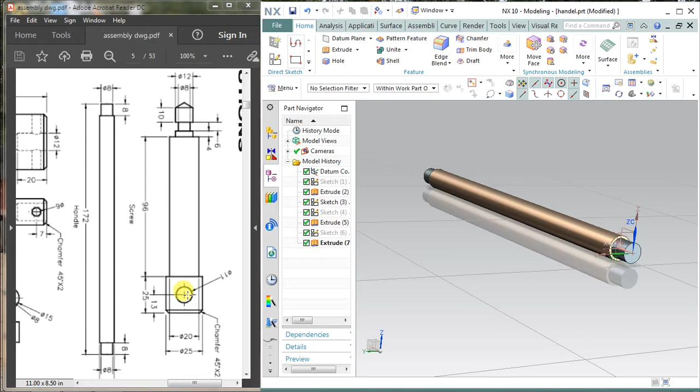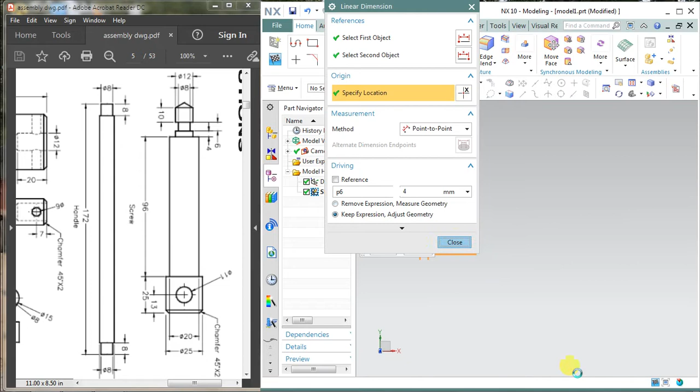Select new, open a new part. Select sketch, choose plane, do sketch. What I'm going to do is make a half sketch of this drawing. It is diameter 8, so I am going to assign 4 mm, because I am making a half sketch. I will revolve the sketch.

Let's start the drawing. Choose this point and draw half section. Leave it as it is. The height is... I think it is going to get outside. It is outside. Okay, now it is okay. The height is 8, assign 8 mm height. Total height is 172.

So drag the line a bit upward. The diameter is 8, and this middle portion diameter I have is 11, because the handle will fix in this hole, so the hole diameter is 11. So assign 11 dimension by selecting linear, select horizontal, select this line and this point, and 11 divided by 2, and close.

Again draw the same thing. Draw a line from the center as well and trim the excessive portion. Again assign the dimension same as before, 8 mm, so it's gonna be 4. Enter, and the height is also 8 mm at the upward direction.

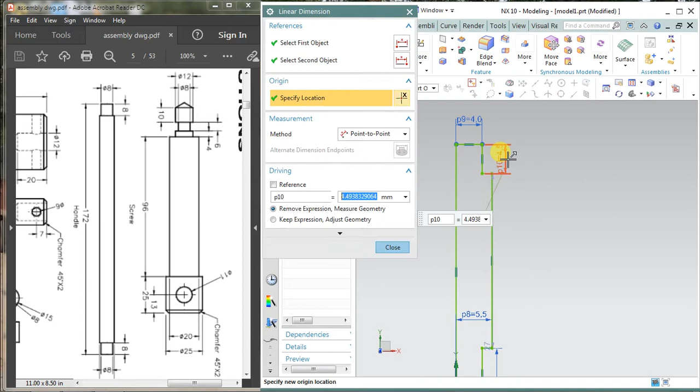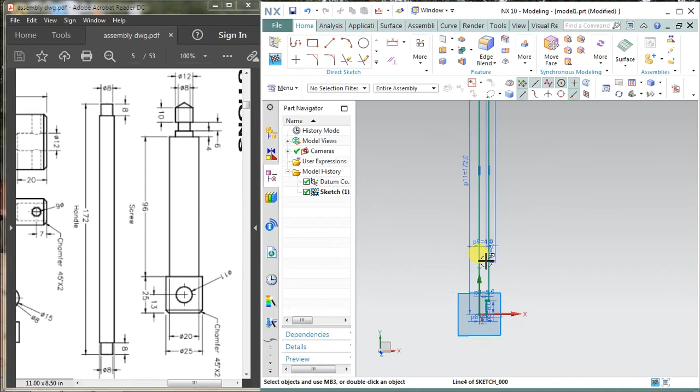Now it's time to assign the total height, and total height is 172. Again select the linear dimension, select horizontal, select this vertical line and assign 172, enter, close. Now it is 172 mm in length. Let's see if there is anything left. No, nothing is left, so select finish.

Choose revolve command. It is asking to select a vector as well as a section. This is my section, and the vector is this. Cancel it, select revolve again, specify the vector. It is taking that x, y... it is y, so select y from this point, specify this point and select the curve.

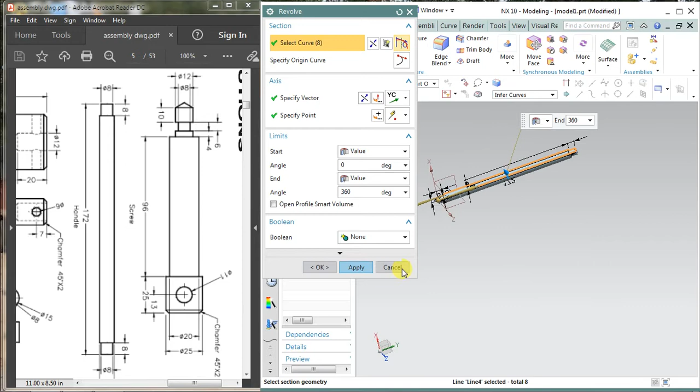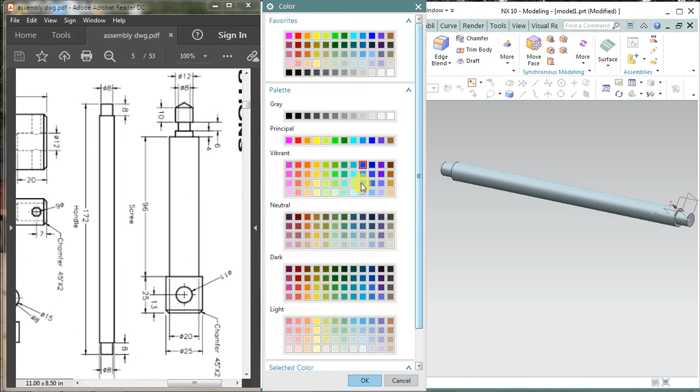Apply and okay. Hide the sketch and assign some color. I told you select assign feature before, select the color. I am selecting this color, dark color, or you can select any color as you want. Select the color as you want, close and okay. Select right, select the true shading.

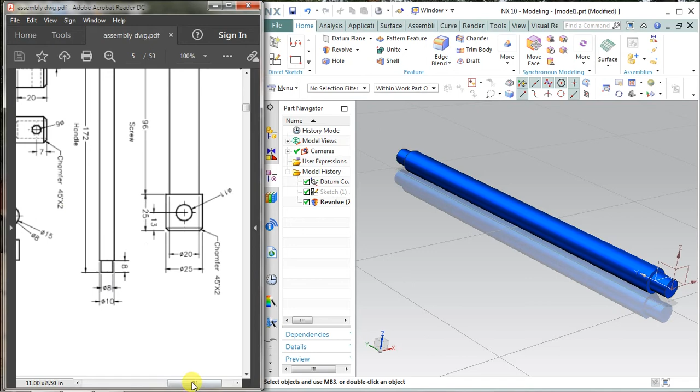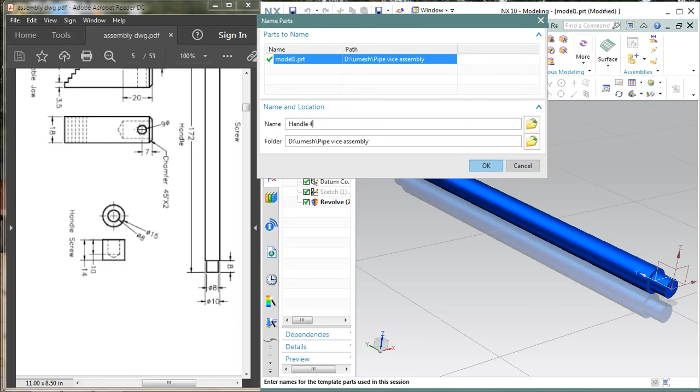So guys, this is the handle, and one thing I am going to make into this tutorial is this handle screw, because this little screw is going to fix at this side. Save your sketch by pressing Ctrl+S, and name it HANDLE, part number 4, and okay.

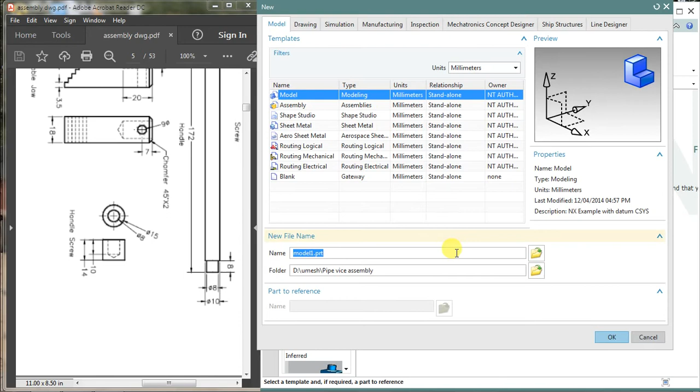So guys, this is the handle, so I saved the handle by pressing Ctrl+S. The next drawing I'm going to make, I'm going to include in this fourth tutorial. Close and open the new page for making this handle screw. Select model and select sketch, choose the plane and draw a rectangle over here.

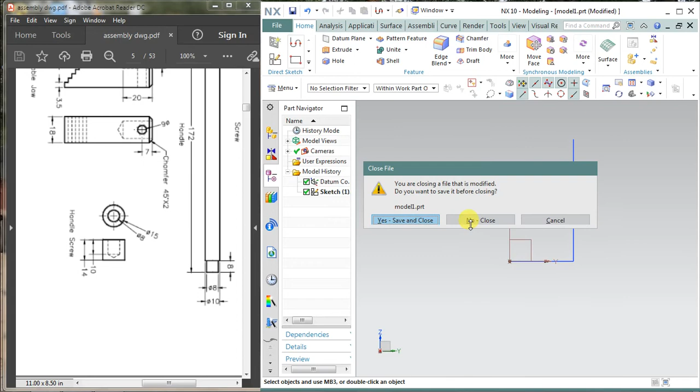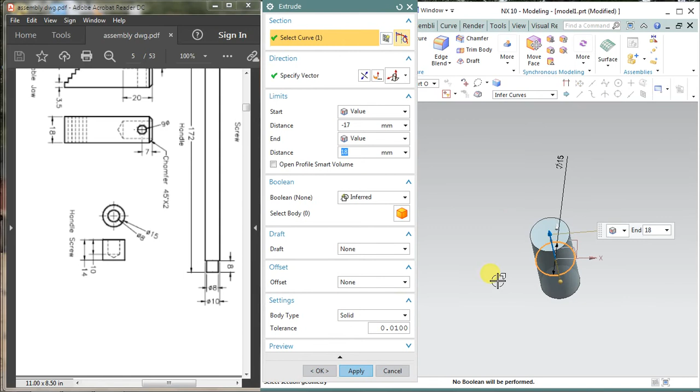Or simply you can just make a circle and extrude that. Let's exit this and select new. Select sketch, this plane, and okay, draw a circle of 15 mm diameter, and I'm feeding 15 mm diameter. Exit the sketch and select extrude command, and the extrusion dimension is I'm keeping it 0, and the total length is 14. So applying 14 here, apply and cancel.

Now there is a hole inside this screw which is 8 mm in diameter and 10 mm in depth. So again I'm selecting hole. The diameter is 8 mm and it is not throughout the body. I'm giving the exact value I have, which is 10, depth value is 10, and this V shape is by default 118. Choose boolean operation subtract from this point.

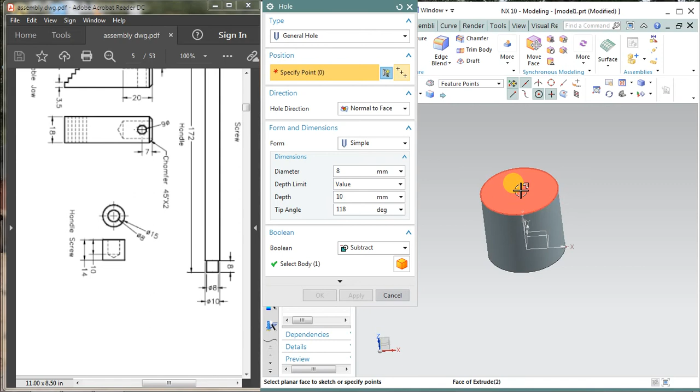Now it is asking you to specify the point where you want to position this hole. So bring your cursor over this edge and now it will show you the center point. Grab that center point for your cap, and now the hole is in its accurate place. Apply and cancel.

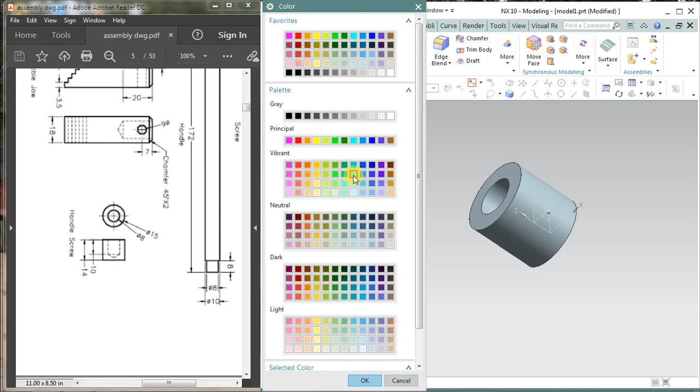Now again assign some color. I am assigning some color by just right clicking over it. I am assigning some light color over it. I think it is okay, apply and cancel. So save it by giving the name handle screw, Ctrl+S, handle screw.